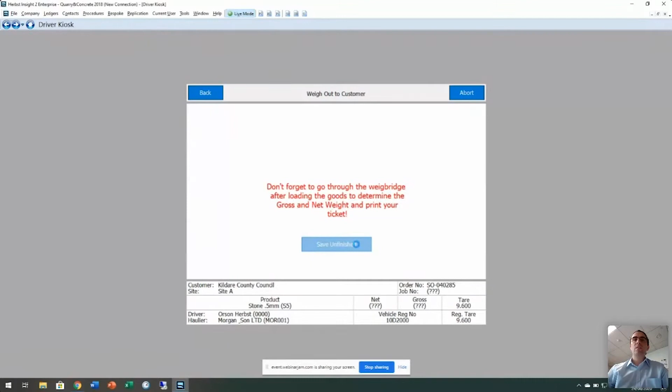Confirming my order - see here, it's weighing the tare in. Our weighbridge, if fully linked to our system, will automatically pull in the tare if it's different to the registered tare, so I won't have to go through this at all. So this is me now weighing in. I go in as a driver, I pick up my load. I don't even have to get off the truck or get out of my cab.

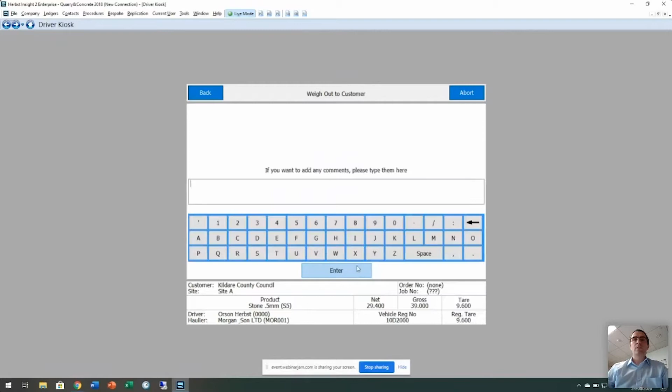Then when I've loaded up and I'm coming back out, I just swipe my card again, pick the load, and confirm where I'm going to. Again this gross weight will automatically be pulled in. It tells me exactly where I'm going to. If I want to add any comments, the driver signs, and then the docket will print out, and the driver can take that docket to site.

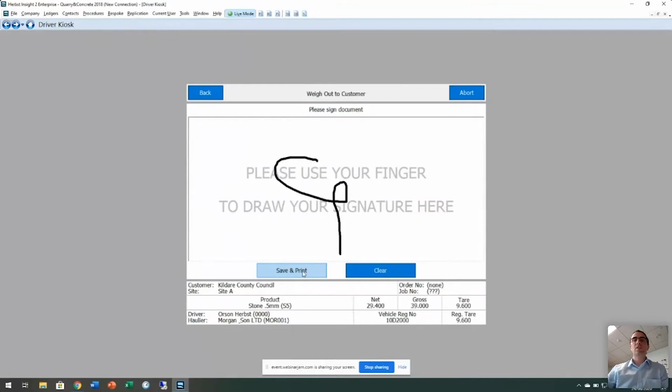Also, we have our Trucker app, which Sean mentioned. So if you are going completely paperless, this will just be pushed to the Trucker app, and it can be signed electronically on site without any paperwork appearing anywhere.

So that's it. As you can see, very simple, very easy to use, very intuitive from the driver's point of view. It's quite easy to use there, especially considering a lot of the drivers wouldn't necessarily be computer literate or whatever. I'm just going to show you another video here of our site, a customer of ours, Loughnane Concrete.

And it's just showing their truck actually.

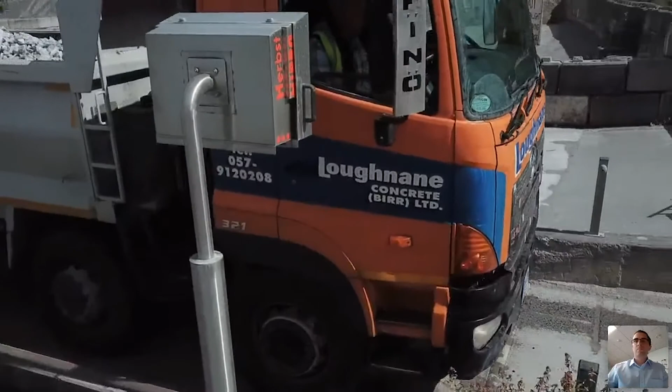So you can see there how easy that was for the driver to use without ever having to exit his cab or see anybody. In that particular case, the driver takes his piece of paper because that customer is not currently using the handhelds, and they go off to site then. He can come back and weigh in and out all day, every day, without ever having to see anybody or get out of his cab unless he absolutely needs to.

So even that standalone kiosk there that you saw on the weighbridge - that's manufactured by Herbst Software, and we can provide that as well and assist with the installation along with the usual driver kiosk software. It can be used either way: as an interface where the drivers get out of the cab, or the better option, what you see in Loughnane Concrete, which is the kiosk at cab height in the weighbridge - especially considering the world we're living in at the moment with COVID-19. The driver should obviously minimize contact as much as possible.

And as I said, if the customer is using Trucker or Trucker ePOD app, we can push the tickets from the kiosk automatically directly to the driver's kiosk. So what happens here is I'm going to run through our Trucker app, and this will be the last thing I do before I hand you over to Jordan. This is not just an ePOD app - it also facilitates the driver checklist and the daily walk around.

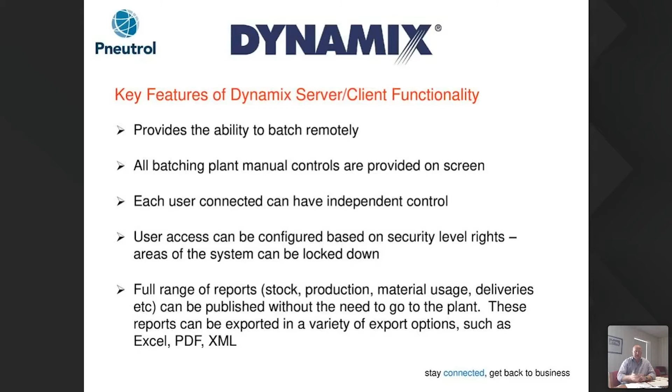I suppose the next big feature I want to talk about is the ability to receive automatic emails. It's configurable within Dynamix, where you can configure the system to receive any number of automatic emails - material usage report at the end of the day, end of the week, end of the month, stock report, production summary, drop and load reports, alarm and event reports.

The big thing we've added to the system recently is the ability to email you if there has been a problem with a particular drop or a particular load. What happens all too often is there's a mechanical problem with a plant - let's say a bin door sticks open, and it overweighs sand or stone considerably. A lot of the time we don't find out there's a problem until either the concrete's gone to site, or until the next day or the day after, when the concrete hasn't set properly.

Now, with this feature, we allow you to configure the system so that if any material falls outside a specified tolerance, it'll send you an email. For example, there's a hub up on screen, your CEMII - you could have a tolerance of 3%. If it weighs any more or less than 3%, it automatically sends you an email to warn you something's not right. PFA could be 5%, sand 10%, 10 mil 7%. So it's all completely configurable. It gives you massive control over your batching plant, so straight away if something's gone wrong, hopefully you can intercept it before it leaves the gates of the plant.

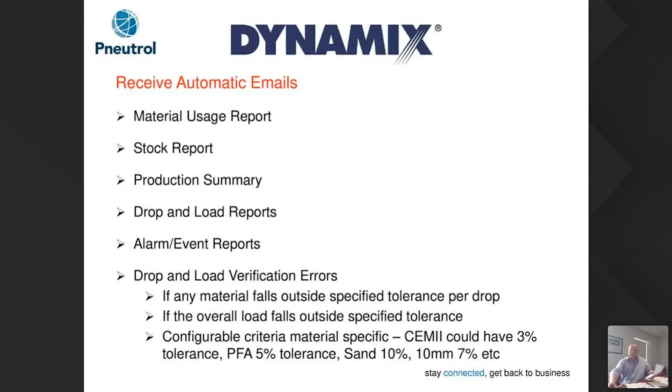I want to go on to look at remote batching. The key parts of remote batching as we see it - you've got a plant, the operator's there, but perhaps you want to batch that from a distant location. Perhaps the batcher man is at a satellite plant - he's going to be driving the loading shovel, doing other things, he may not be in the batching cabin all the time.

If we look at your account system, a standard link-up from our system to an account system, say like Herbst, works as follows: the order is taken by telephone or whatever the ordering process happens to be. The job details are entered on Herbst and sent over to the Pneutrol software.

Because that's all done automatically, there's only data entry once. Some of the problems we'd otherwise see: an order is taken by an ordering office, all the details are written down, then passed to the batcher man verbally over the telephone or by email, and he has to type it into the PLC software on his own. A mistake can happen at any point in that process, so having all this happen automatically removes the possibility of mistakes.

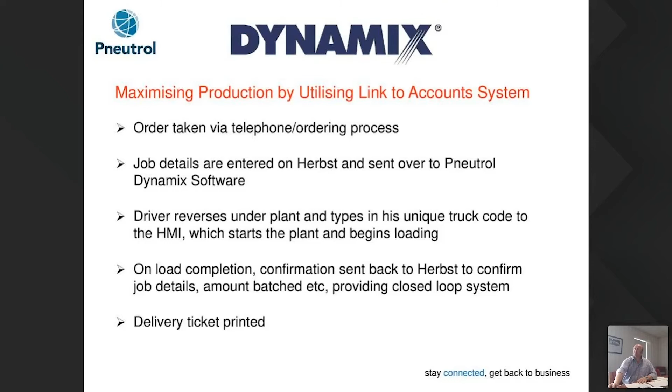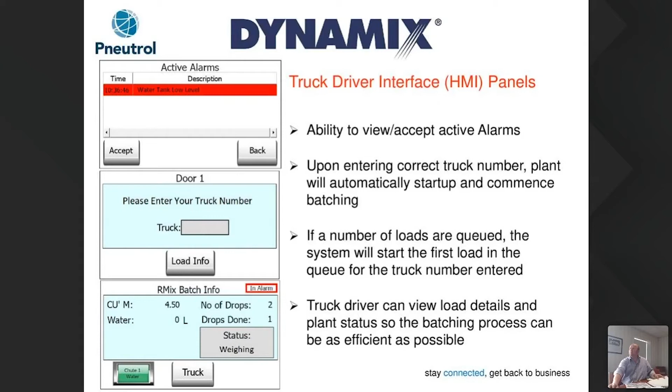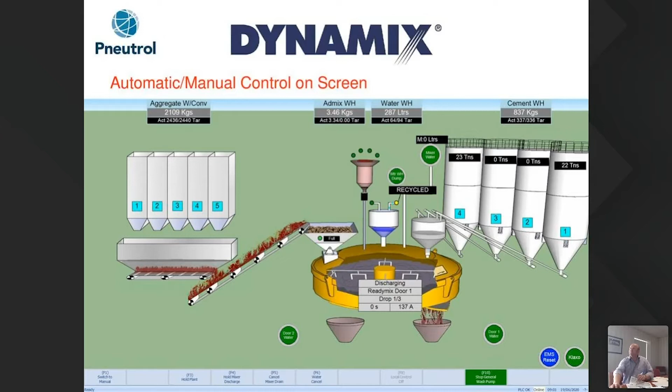Our software team will configure the software and the manual controls dynamically as per the plant and as per the customer requirements.

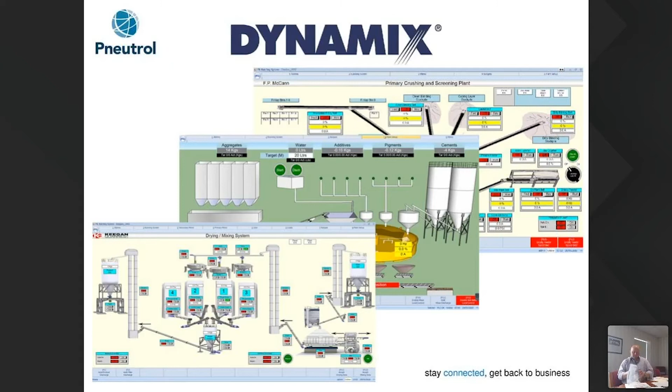I suppose just in summary then, Dynamix is Pneutrol's latest batching software. It can provide everything your business needs for remote batching. We can add on truck signs, HMIs, CCTV to ensure remote batching works for you. The key thing of Dynamix is you can connect to the plant from your own desk. You can run reports, check stock levels, modify recipes - all without the need to ever go near the plant.

And Dynamix can be set up to automatically email reports or details of weighing issues, all completely automatically.

I suppose what makes us different from our competitors is that we manufacture and distribute our finished product in-house, as well as manufacturing the binder for resale to the UK and throughout Ireland as well.

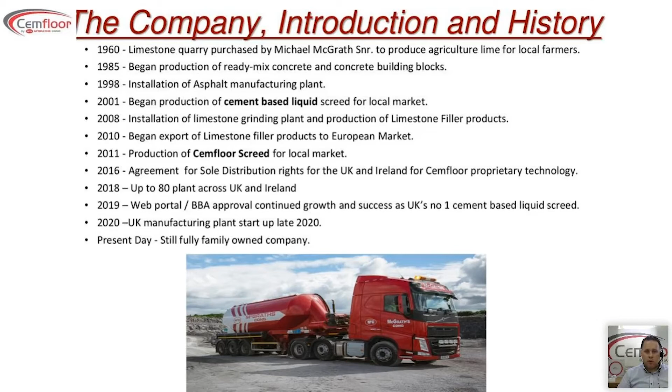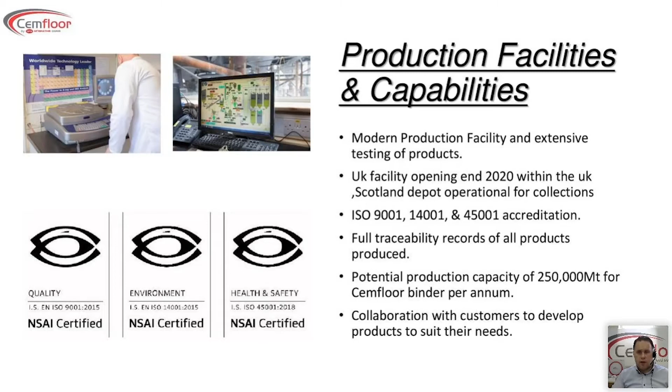Production potential of about 250,000 tonnes of Cemfloor binder per annum. We do a lot of collaboration with our customers to develop products to suit their needs as well.

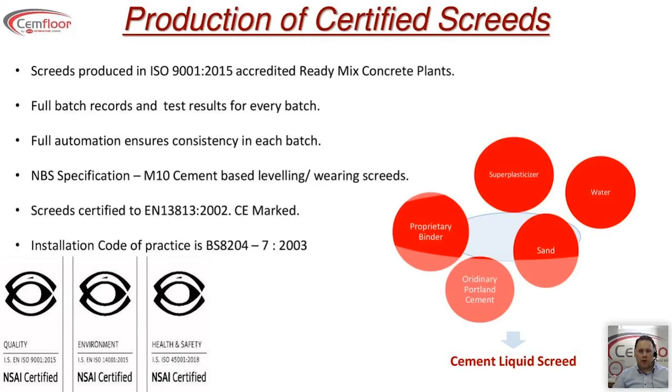They're installed under the code of practice BS 8204. You can see there's the Cemfloor proprietary binder, delivered by bulk tanker, blown into a silo, and then added to Portland cement, sand, water, and super plasticizer within the plant. Then you produce your Cemfloor liquid screed.

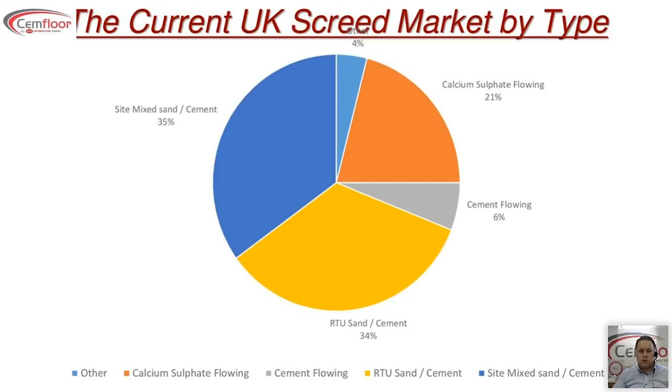Just to take a quick look at the UK market, predominantly the market there is still very much traditional sand and cement screed. The flowing screed market has grown by about 15% in the last 3 years, but we still see it's traditionally the old way of putting in dry screed, which thankfully is changing.

The types of screed: you have a semi-dry screed, which is the old dry screed. You have a calcium sulfate screed, which is anhydrite, hemihydrate, gypsum, self-leveling screeds. Then you have a cement-based flowing screed, which is what we're talking about here, Cemfloor. It combines the best of both products — a cement-based product that's self-leveling as well. So it can be known as a self-leveling traditional screed because you have the benefits of both.

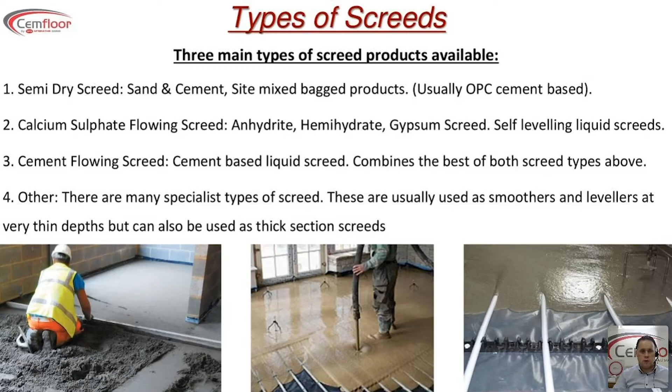The benefits of using Cemfloor: health and safety concerns are reduced, such as cement burns, joint pains, dust inhalation, and manual handling. It's much faster on installation, so 1,000 meters squared per day can be easily achieved. That means in these current regulations with COVID, you have less men on site, less time on site, so it's a faster, quicker, and more robust job.

It's certified material with full batch records and test results, produced in accredited plants and delivered with full records, traceability, and certification. It's delivered to site and installed immediately, meaning less congestion on site and no need to store materials on site. It's also less labor intensive, with fewer operators, which is ideal in the current restrictions.

It's easier to achieve a flat surface finish, so a minimum of SR2 is well achievable. It's possible to install it at reduced depths, with reduced drying times due to the reduced screed depth — it can be force dried after 7 days. One of the main advantages of the cement-based liquid screed over gypsum is the drying times, which are exceptionally quicker. It also works well with underfloor heating, fully encapsulating the heating pipes and giving excellent thermal conductivity.

And with the same binder in your silo, you can also produce a self-compacting 10mm concrete, which we call Cemfloor HPC, Cemfloor High Performance Concrete.

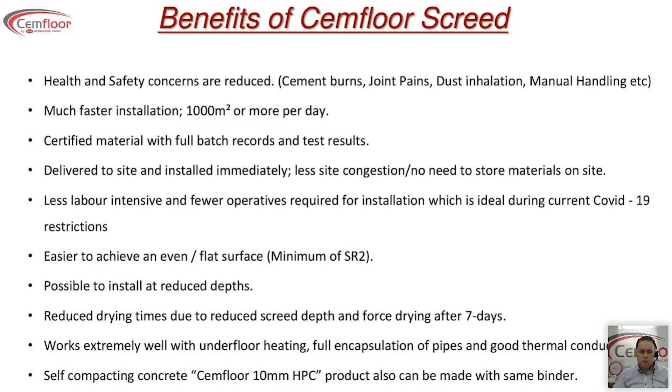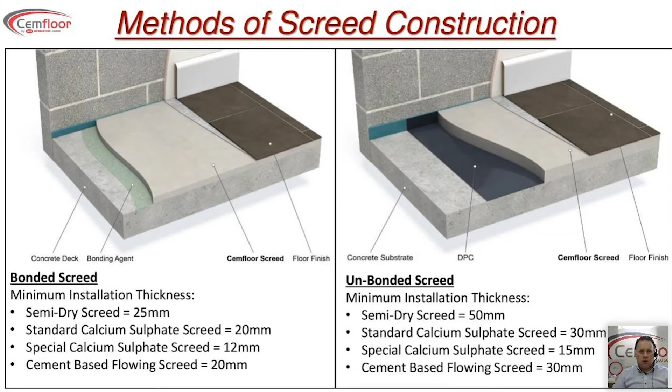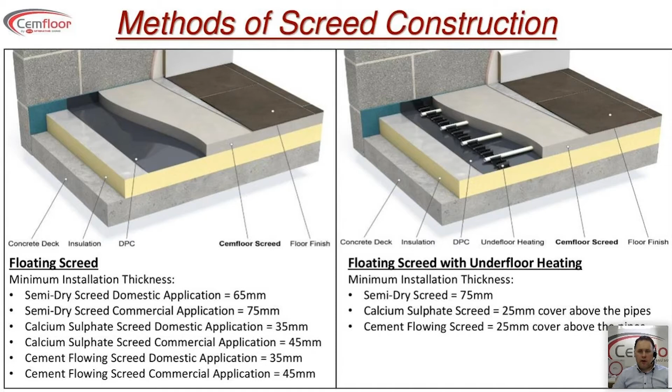These are the methods of screed construction. You can do a 20mm bonded screed, or a 30mm unbonded screed. For a floating screed on insulation, it's 35 mil on domestic applications and 45 mil on commercial applications. A floating screed with underfloor heating installed is 25 mil above the pipe, so we recommend a minimum of 25 mil pipe coverage.

This is Cemfloor being delivered to site by truck mixer. A flow test is carried out before the product is used — all our applicators are approved and trained by ourselves on the installation of Cemfloor. It's pumped into site, then dappled and finished. So it's a simple application, but again, it's a specialized trade where we train up all our applicators.

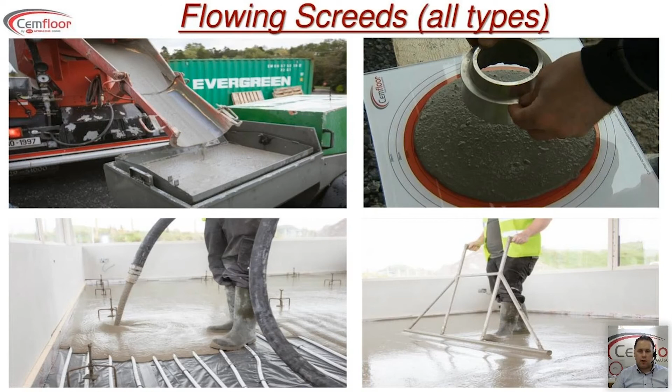The advantages of using Cemfloor: all the benefits of a flowing screed. You don't have any sanding to remove laitance like gypsum-based screeds. It dries ready for floor finishes very quickly, so tiles can be laid on a non-heated floor after 4 days, whereas vinyls can be laid within 3 to 4 weeks, depending on site conditions. It's very robust and stable, so there's no segregation or bleeding in the mix.

It has complete compatibility with cement-based floor levelers and adhesives, and compatibility with other products in the batching plant, with no cross-contamination. This is an important point — the Cemfloor binder doesn't contaminate your standard concrete mixes. Most of our customers who would potentially be producing liquid-based screeds would also produce concrete; it's very rare to see a specialized screed plant. So you need a product that doesn't contaminate your standard ready-mix concrete like gypsum would.

It can be used in wet areas, such as wet rooms or changing rooms, or anywhere water ingress can happen. It can also be wet or dry batched — a lot of our channel partners wet batch it through a pan mixer or a horizontal mixer, while others use dry batching. It's just a different procedure, and again, we provide all the training and backup for plant startups.

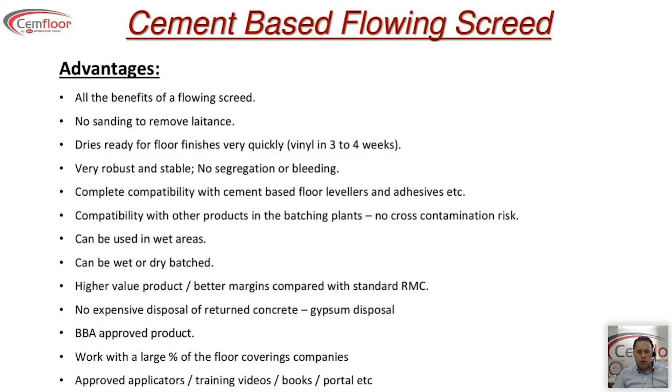So I suppose we work with all the tile companies and vinyls and adhesive companies closely. So it's not just about giving product awareness to our end users, it's about the people that come after us as well. Make sure they have full knowledge of the product. So again, all our applicators are approved. We supply them with training videos, books, and access to all the information on our website portal.

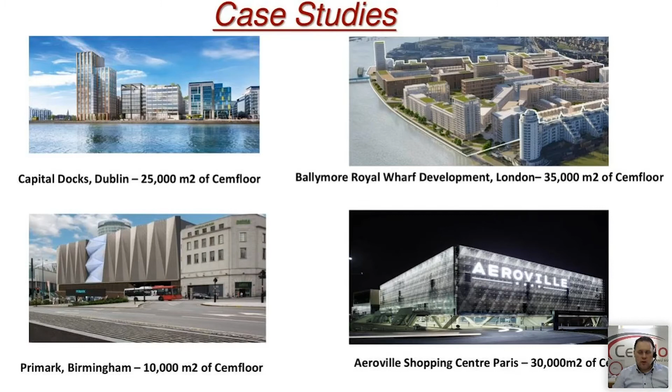We're currently on site in Battersea Power Station as well, so that's quite a large job for us. It's been used continuously throughout Ireland and the UK in everything from small extensions to massive projects, residential and commercial.

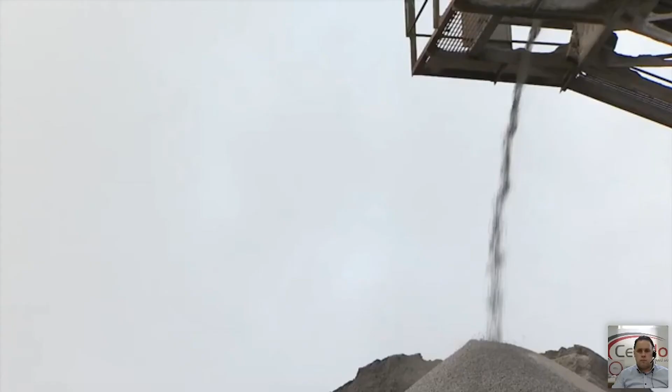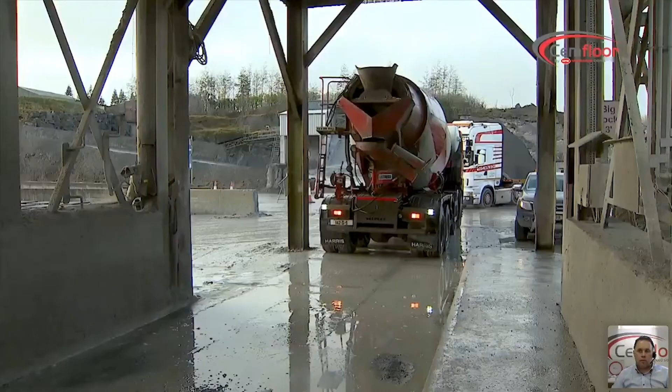Cemfloor proprietary additive is a mixture of carefully selected materials which are blended on-site in our automated production facility to the highest of standards.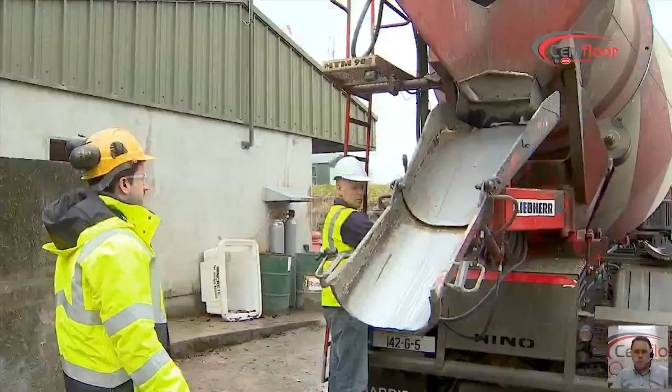Cemfloor screeds are produced in a certified approved factory by mixing all the ingredients at carefully selected proportions. After batching, the mixed screed is sampled and tested for slump flow, compressive strength, flexural strength and drying shrinkage to ensure its conformance to EN 13813-1.

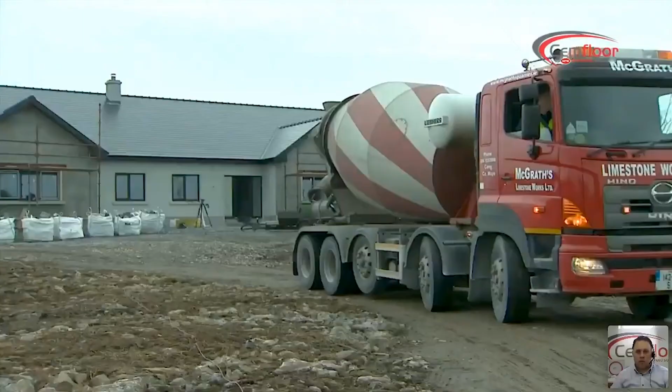The ready mix screed is delivered to our clients on site, ready for use. This process ensures a consistent high-quality product every time. Cemfloor screeds are installed to level tripods which have been preset by a laser level and staff.

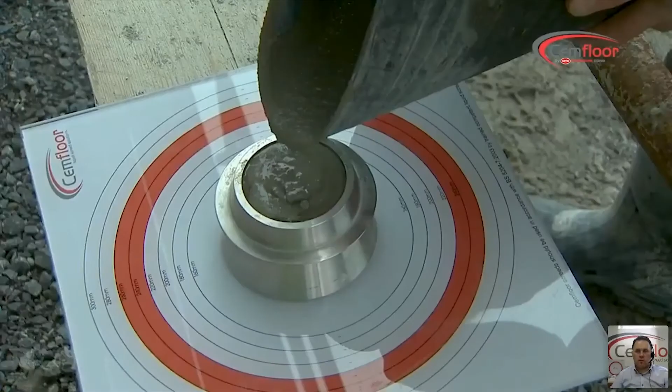This allows the screed to achieve a minimum surface flatness of SR2. After carrying out a flow test on site, the Cemfloor screed is pumped into the carefully prepared floor area and is placed by approved contractors in accordance with BS 8204-1 who have completed the required training for the placement of Cemfloor screeds.

Compared to traditional screeds, Cemfloor screeds are placed much easier and the risk of damaging the subsurface and heating pipes is eliminated due to the self-flowing characteristics of Cemfloor screeds. Cemfloor is also much easier to lay than traditional screeds as it is self-leveling and doesn't need to be power floated to achieve a smooth level surface.

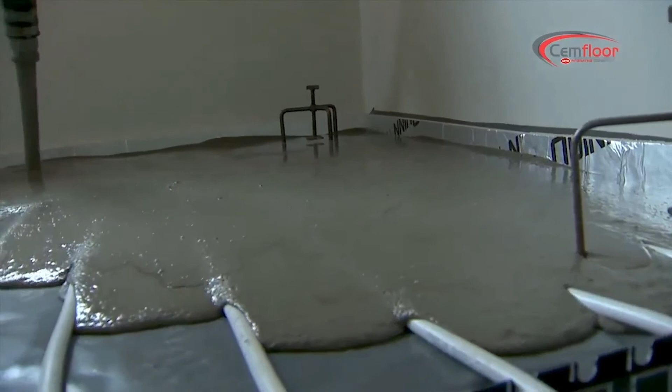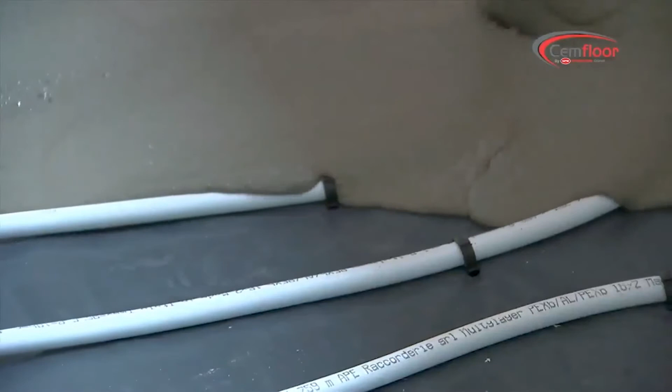One of the main benefits of Cemfloor is the speed that it can be laid at. In most cases, up to 10 times faster than conventional screed or up to 2,000 square meters a day. This results in much shorter build times and increased productivity for our customers.

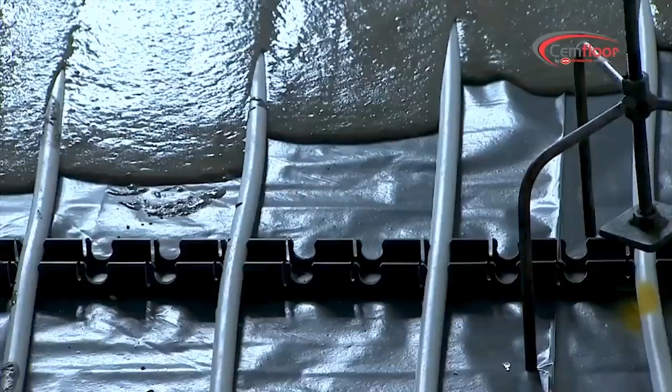Cemfloor totally encapsulates the underfloor heating pipework, eliminating air voids around the pipes, which is a common problem with traditional screeds. This benefit ensures maximum heat transfer from the pipework to the screed.

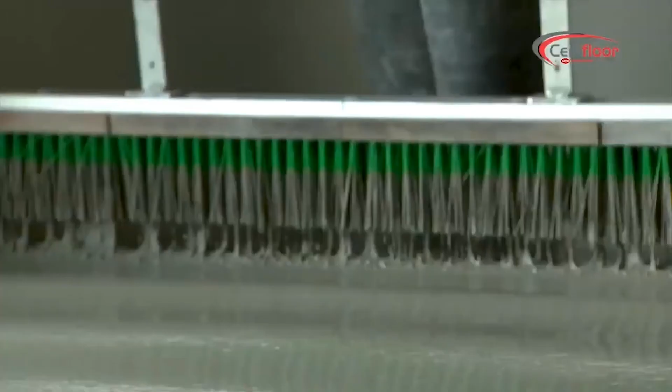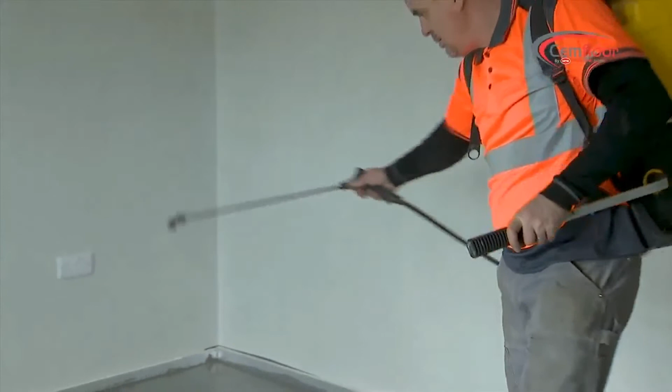Cemfloor screeds are practically self-leveling and only require a gentle dappling to achieve the necessary smooth surface finish. Once dappled, a suitable curing agent is applied to prevent water evaporation during initial curing. To speed up the drying process, the underfloor heating can be turned on after 7 days.

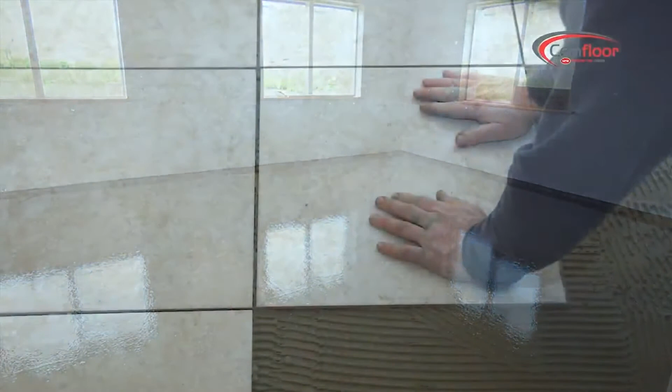Cemfloor is compatible with all standard floor coverings including tiles, carpets and timber floors. As Cemfloor is a cement-based screed, it is compatible with all types of floor adhesives that are used to apply the final floor covering. The adhesives can be applied directly to the hardened screed surface without the need for expensive primers or sealers.

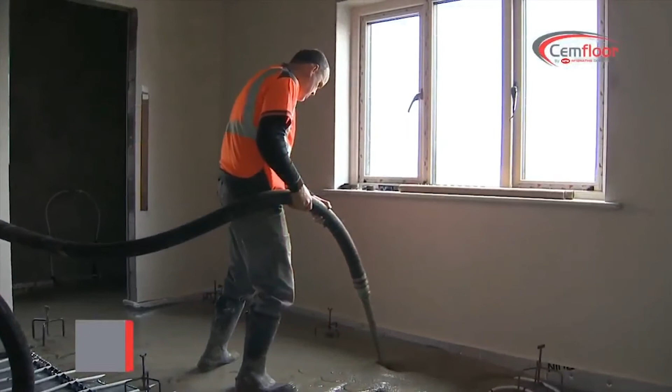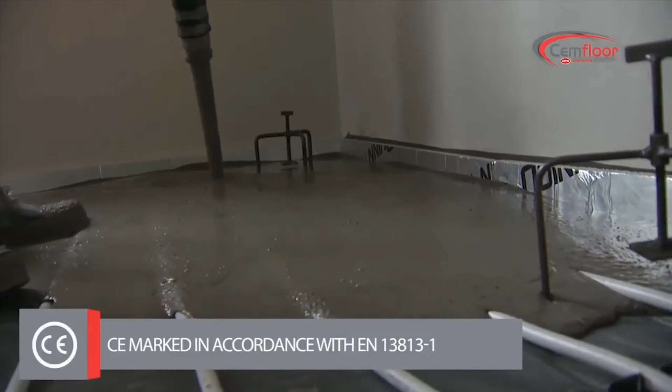The main benefits of Cemfloor screed: reduced screed depths compared to traditional screeds, substantially improves the performance of underfloor heating, no curling or cracking of the finished screed. It is CE marked in accordance with EN 13813-1, can be foot trafficked after 24 hours, less labour intensive, reduced installation time and reduced health and safety risks.

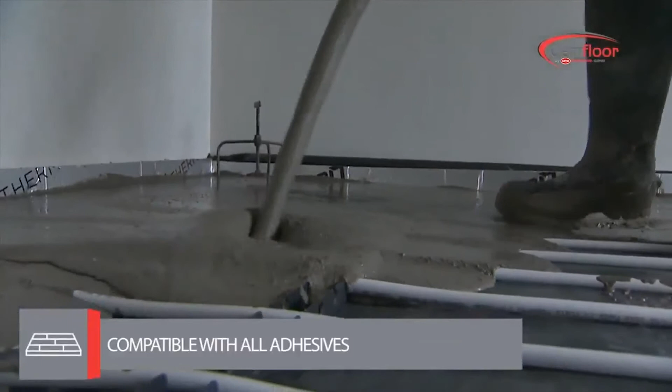No need to sand the hardened surface to remove laitance. Reduced drying times. The underfloor heating can be turned on after 7 days. Compatible with all types of floor covering adhesives. No need for primers or sealers. Suitable for both domestic and commercial projects and can be used with or without underfloor heating.

So moving on to weighbridges, I'm just going to go through a few of the main types of weighbridge on the market, what you can choose from.

The first one up is a flat top weighbridge deck design, which is quite aptly named because the top surface of the deck is smooth. It's probably the most common weighbridge type being supplied nowadays, and probably the most flexible because it can be used either overground with ramps to access it, or in a pit for flush mounting. The flat top weighbridge is available in an all-steel structure or in a concrete composite deck design.

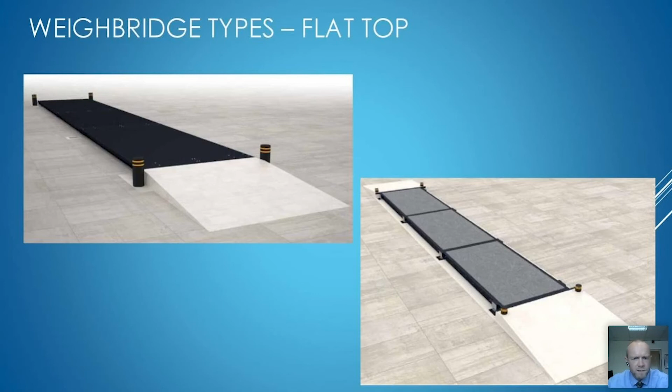The next type of weighbridge is a drive-through weighbridge, which many would see as the more traditional or old-fashioned style. It's distinguished by the tall RSJs or I-beams down either side of the bridge that make up a big part of the strength of the deck structure. But moreover, it also forms natural curbing or a crash barrier to prevent a vehicle or a wheel from going over the side of the weighbridge. Again, available either as steel or concrete.

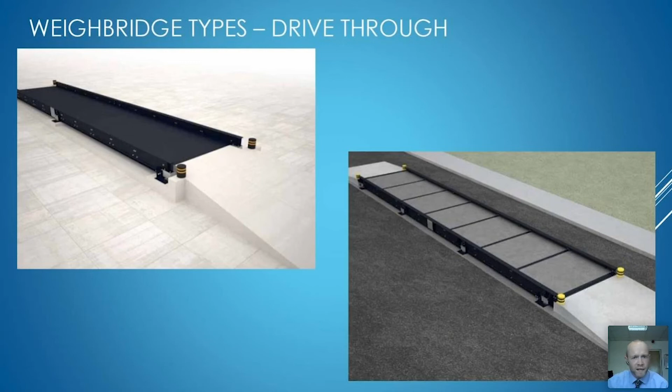And the final type of weighbridge I'll show you here is what we would call a dual track or portable weighbridge, designed to be easily and quickly installed and easily and quickly relocated. So all of the modules are small enough to be moved around by a forklift truck. No crane is necessary, and it can be moved on. So it's suitable for short-term projects.

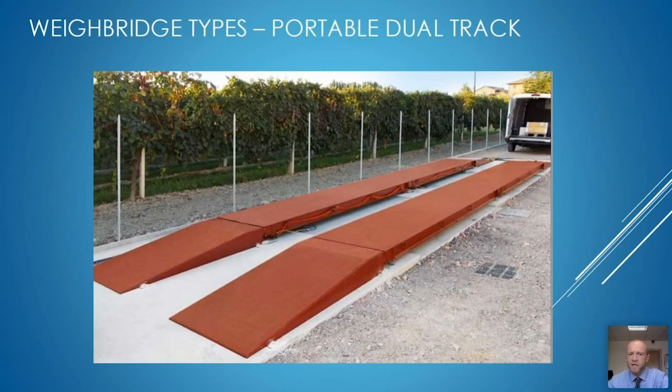Moving on to the question of whether a concrete deck or a steel deck is better. In simple terms, a concrete deck is usually a more cost-effective and longer-lasting solution, if you can plan ahead. The disadvantage is that you have to wait for the concrete to cure, so you're looking at 3 to 4 weeks from delivery to commissioning. But if you can plan ahead and it's perceived as a permanent installation, I would always steer people towards a concrete deck.

On the other hand, if you see the weighbridge as being relocated down the road, or if you really need to get up and running in a hurry, a steel deck can be installed and commissioned in one day. So in those circumstances, a steel deck might be the one to go for.

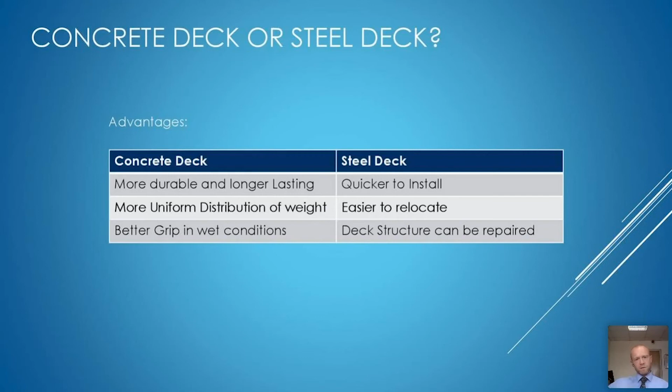The next question is whether the weighbridge should go overground or flush in a pit. What I'd say to most people is if you have space in your yard to put the weighbridge overground with access ramps, that's probably the way to go, for a few reasons: it's the lowest cost civil works, and cleaning and service is easier on an overground weighbridge over time. So for those reasons, that's the way the majority of bridges go in.

Although, if yard space is at a premium, sometimes a weighbridge has to go into a pit because it doesn't take up anywhere near as much space. And there are, of course, some health and safety benefits to having a weighbridge flush with the ground.

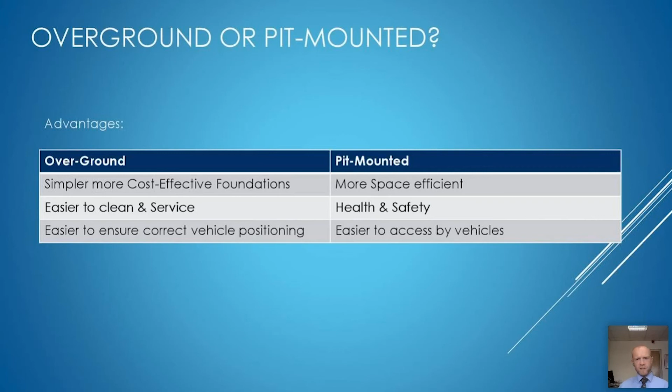At the heart of any weighing system are the load cells, or the weighing sensors that do the weighing. I'm going to show you a few of the different load cell types that can go under a weighbridge. We've probably used just about every type of load cell over the years, so we've learned from our experiences.

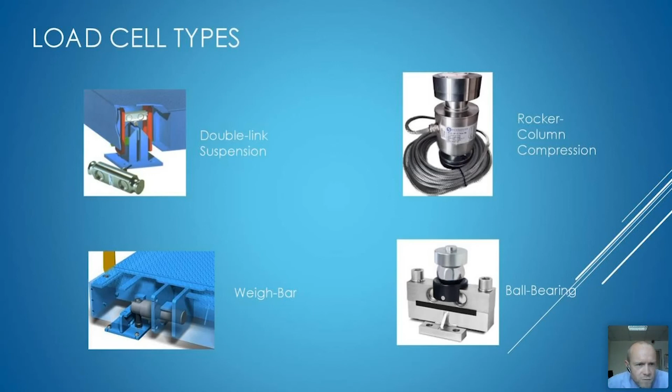To give you an idea of them all, I'm going to try and scribble to highlight what I'm speaking about. The first type is the double link suspension system. That's a load cell that sits on top of a pedestal, and the weighbridge actually hangs from steel links, large chain links, so it's hanging or floating - a free floating design. The system works quite well. The disadvantages would be that it's quite an expensive mounting arrangement, and you can end up with broken links over time.

The second type of weighbridge load cell is the weigh bar. It's a very nice design in principle, in that it's built into the weighbridge, and the weighbridge either hangs from links again or sits on top of a load pin. The downside to weigh bars, which we don't use as a matter of course, is that they're made of mild steel, so they'll rust over time. Secondly, they're not that well sealed, so moisture ingress can be a problem over time.

Moving on to a ball bearing type load cell - the weighbridge sits on top of a bracket, on top of quite a large ball bearing, and the deck structure is free to roll around on these ball bearings within certain limits. It's a really nice design and it performs really well. My only hesitation to use these in practice is that most of them are made of an alloy steel, which again will rust over time.

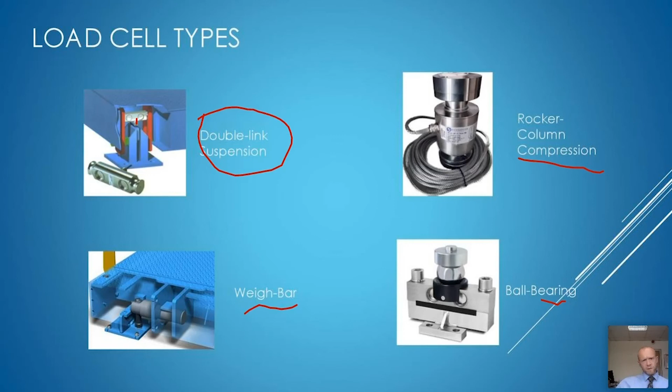So our weighbridge of choice would be the rocker column compression style of load cell. It's simply a column, and the weighbridge sits directly onto the column in order to perform the weighing. I'll go on to my next screen and show you some of the features or specifications you would ideally get in an ideal weighbridge load cell.

The type of load cell we use on our weighbridges has all of these features. The ones on the previous slide, none of them will have all of these features - they'll have some of them. Ideally, your load cell will be made of stainless steel, meaning it's obviously not going to rust or rot over time, and it's a much longer lasting proposition.

The IP protection of the load cell shows how dustproof and waterproof it is. IP68 signifies that a load cell is suitable for temporary immersion underwater. IP69K signifies that a load cell can be washed down with high pressure water - it's the gold standard in terms of environmental protection. In the UK and Ireland, we're no strangers to rain, so whatever's under your weighbridge probably wants to be able to stand up to some water and some dirt.

In terms of load cell accuracy, C3 is by far the most common on the market. C3 means you can have 3,000 scale divisions. That maybe doesn't mean a lot to most people, but in weighbridge terms it means your 50 or 60 ton weighbridge can weigh in 20 kilo increments. C6 is a step up from that - you're allowed 6,000 scale divisions, meaning your weighbridge can weigh in 10 kilo increments.

Built-in surge protection. Not all load cells have this, but some do, and it's a great feature, because one thing that load cells fear are electrical surges, mainly lightning, but occasionally poor power or fluctuations in power or power cuts can lead to surges that damage load cells. So the built-in surge protection in a load cell

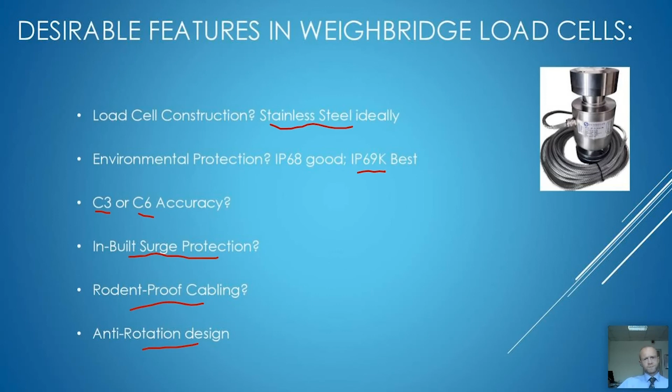The next thing is the question over whether digital or analog load cells are best, and that's a debate that could go on forever. But to give you a quick idea of how load cells work in the first place, a load cell is supplied with a DC voltage, and within the load cell, that voltage is converted to a millivolt analog signal, which increases with increasing weight applied to the load cell.

On an analog load cell, the analog to digital conversion happens in the weight indicator. So how the millivolt signal translates to a figure on screen is happening in the weight indicator in your office. On a digital load cell, that conversion happens in the load cell itself.

There are some advantages in terms of diagnostics, service and adjustments, calibrations - mainly advantages to the service engineer - with digital load cells. But a word of warning: the main reason manufacturers developed digital load cells is to have a proprietary product under the weighbridge, which, if you ever felt like moving suppliers, would make it a very difficult or expensive exercise. So for me, I'd recommend analog load cells as being a more widely available, more widely cross-compatible option. The other thing to note is that, in recent times, it's possible to get full digital weighbridge functionality from a digital junction box whilst retaining the advantages of analog load cells.

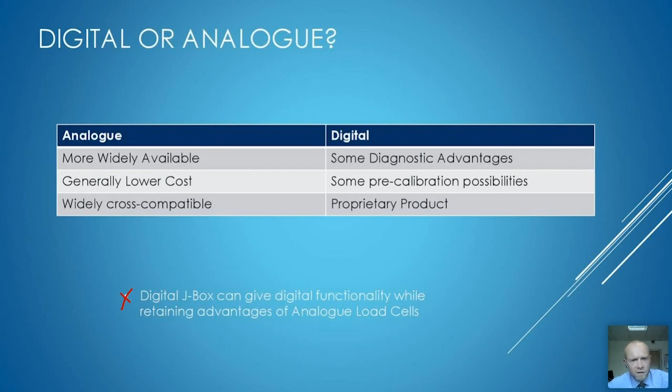Firstly, we'd have CCTV cameras that can, at the same time as the weight is being captured in a weighbridge transaction, store the CCTV images to the weighbridge docket or ticket. In terms of Herbst, we're talking about the Herbst cam module, where you can index images along with the weighing transaction.

You can have further cameras at the front and back of the weighbridge to capture the vehicle registration plate. We have traffic lights, remote displays for the driver's benefit, and, like the video Callum showed earlier, driver-operated terminals or driver kiosks on top of poles at the end of the weighbridge, where weighbridge transactions can take place from the cab of the vehicle without ever having to dismount.

Without ever having to make contact with the outside world. The last couple of features here are optical sensors to control the position of the vehicle on the weighbridge, so that if a wheel happened to be over the end of the weighbridge, it would prevent the weighing transaction from taking place until the vehicle is properly positioned.